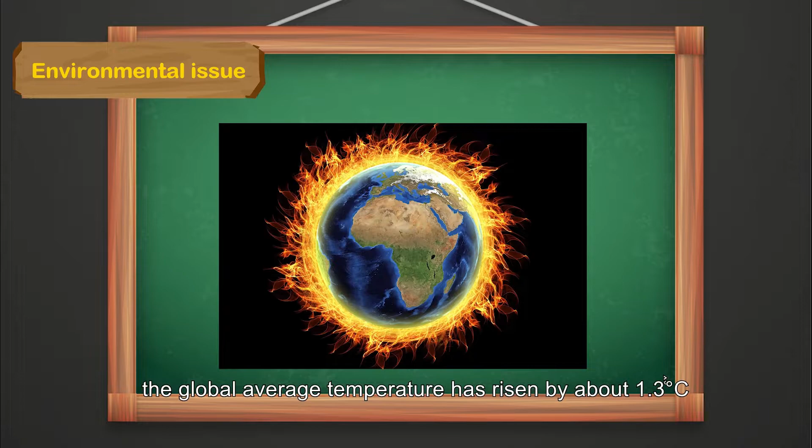Over the past 100 years, the global average temperature has risen about 1.3 degrees Celsius. Reducing the environmental pollution and greenhouse gas emissions caused by fossil fuels is a mission we have to face. For sustainable development in Taiwan, the Executive Yuan has set a target of 27 gigawatts of renewable energy power generation in 2025, accounting for 20% of the total power generation.

In response to the advent of the green economy era, the Executive Yuan officially announced the promotion of the construction of the Shalun Green Energy Science City in Tainan, with the four main targets of energy creation, energy storage, energy conservation, and system integration, to promote the development of the green energy industry and enhance industrial competitiveness.

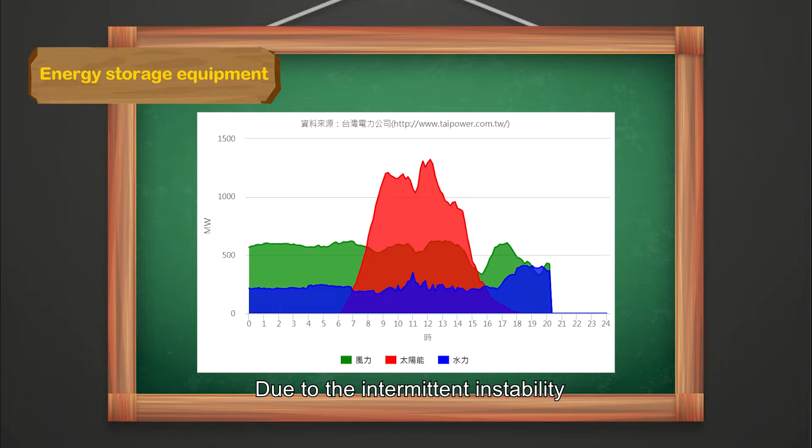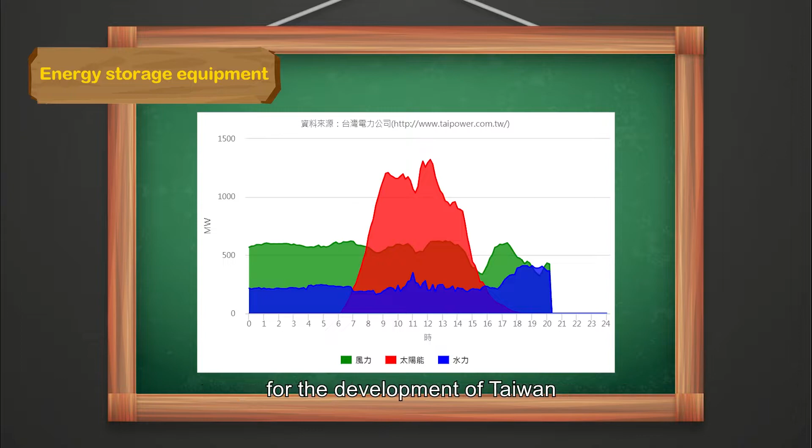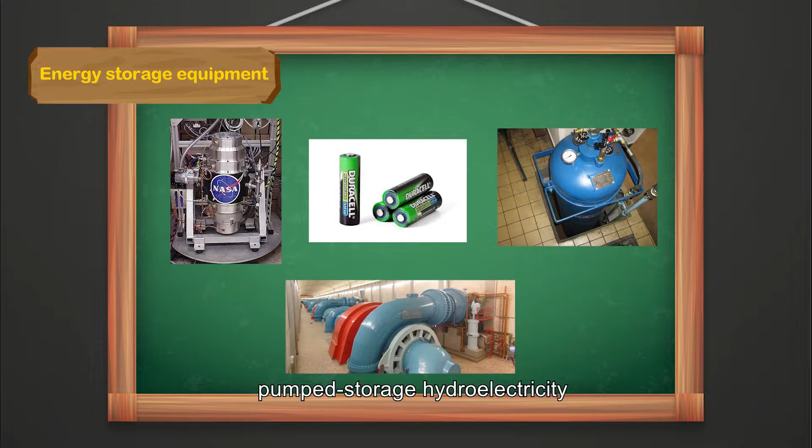Due to the intermittent instability of renewable energy power generation, the development of a set of stable and reliable energy storage technologies is of importance for the development of Taiwan. Common energy storage methods include flywheels, batteries, compressed air, pumped storage hydroelectricity, and power-to-fuel. Among them, power-to-fuel is the most suitable energy storage technology for large-scale and long-term discharge.

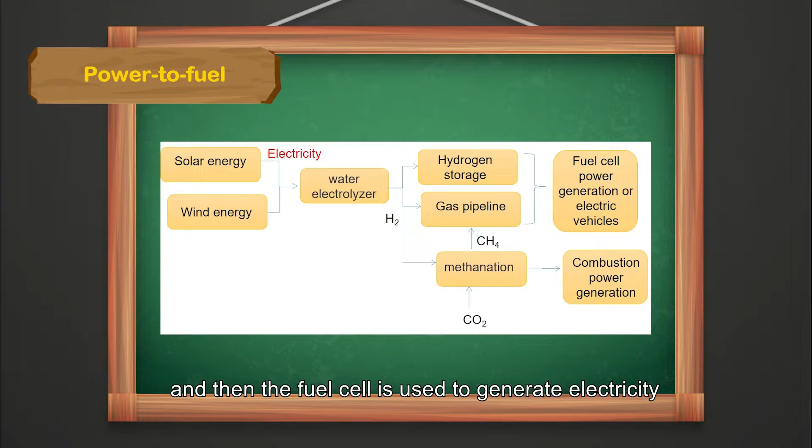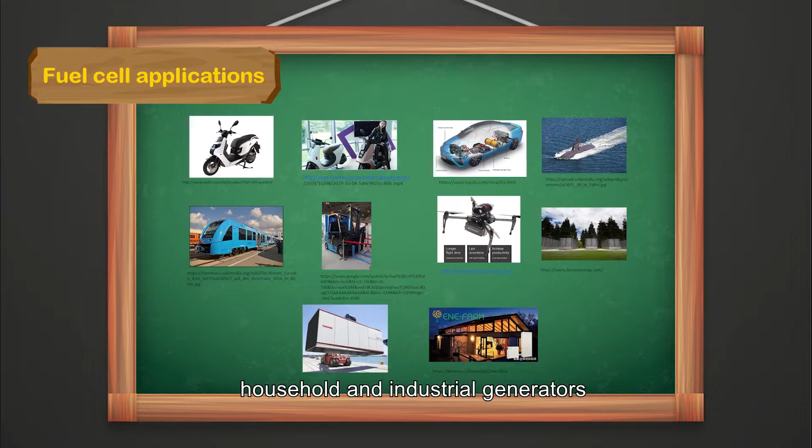Power-to-fuel is the use of electricity from renewable energy to produce hydrogen through water electrolysis. Hydrogen is stored, and then the fuel cell is used to generate electricity. Examples of fuel cell applications include motorcycles, vehicles, trains, forklifts, drones, submarines, household and industrial generators. For example, Japan's Toshiba released power-to-fuel products in 2015.

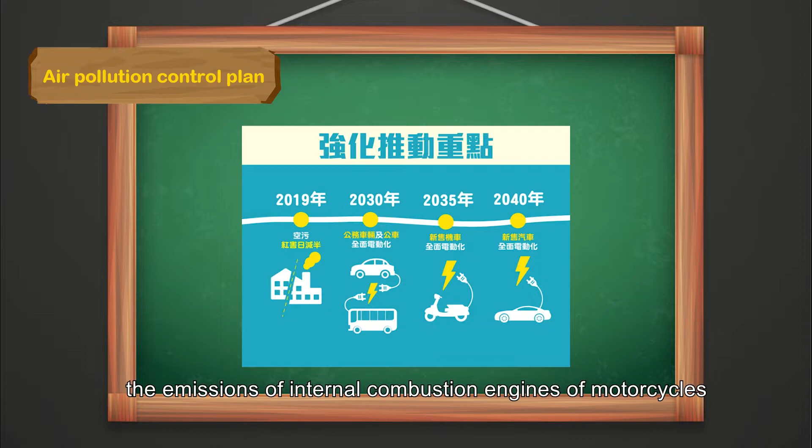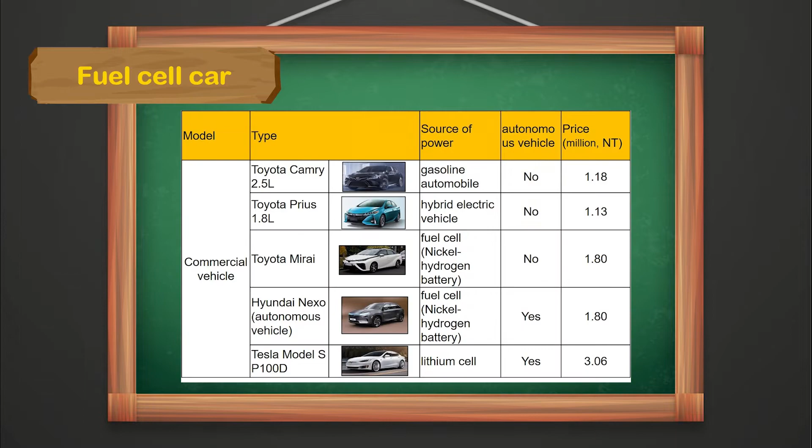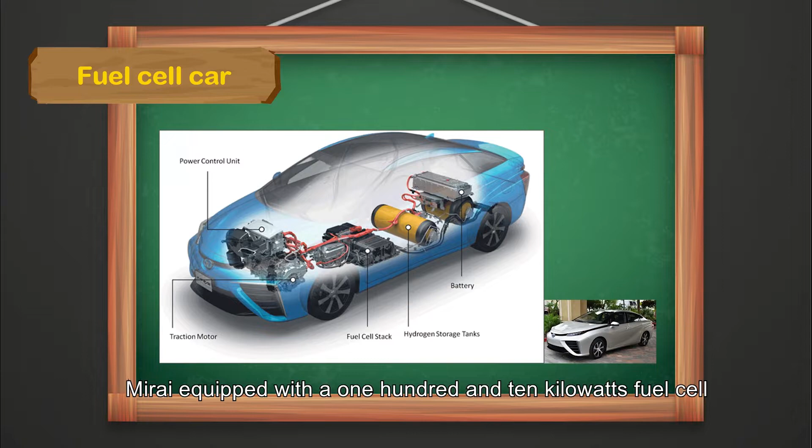At present, commercial fuel cell vehicles have been sold abroad. Take Toyota Mirai as an example. Mirai, equipped with a 110 kilowatt fuel cell and filled with 5 kilograms of hydrogen, can run 500 kilometers.

In view of the importance of hydrogen energy and fuel cells, Yuan Ze established the Fuel Cell Center as early as year 2000.

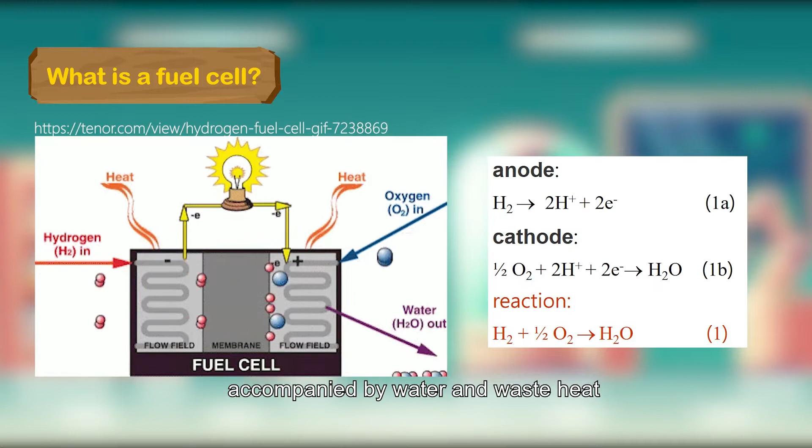If H2 and O2 can be continuously supplied to the electrode, the fuel cell will continue to generate electricity, accompanied by water and waste heat. The design of the fuel cell needs to consider several factors. For example, in order to improve the uniformity of fuel power generation, it is necessary to design and install a gas flow channel plate, a gas diffusion layer, and an airtight gasket on the outside of the electrode.

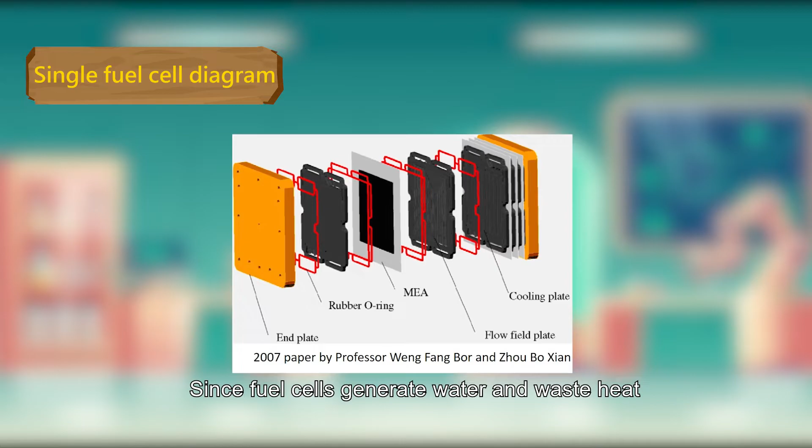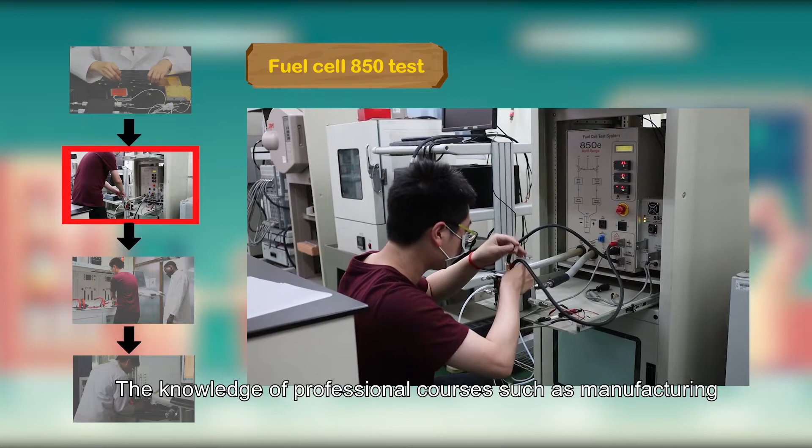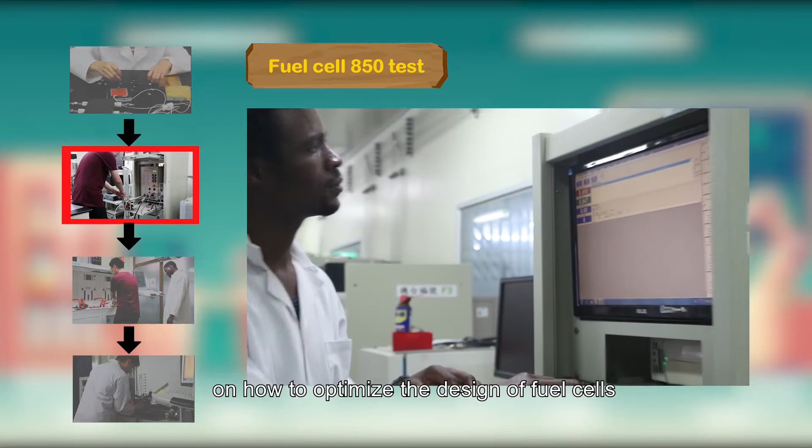Since fuel cells generate water and waste heat, water and heat management and fuel fluid delivery are also key design technologies. The knowledge of professional courses such as manufacturing, heat transfer, fluid mechanics, and fuel cells taught by the Department of Mechanics can educate students on how to optimize the design of fuel cells. In order to improve R&D efficiency, the center designed an 8-channel fuel cell measurement instrument.

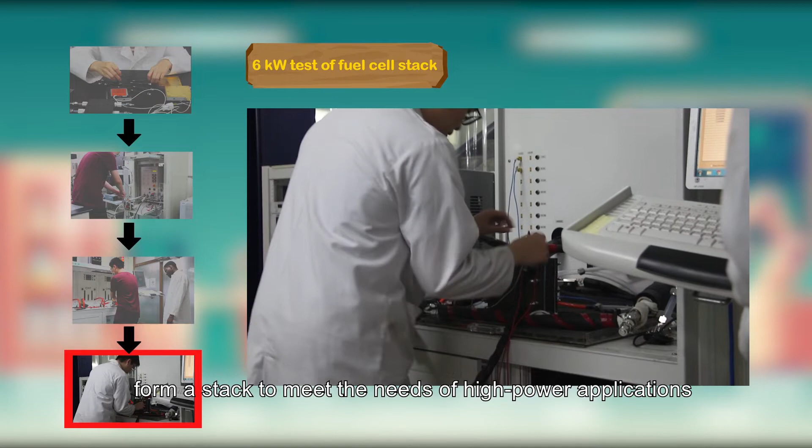Fuel cells can be connected in series according to the amount of electricity generated to form a stack to meet the needs of high-power applications such as energy storage and electric vehicles. The center has a 6 kilowatt fuel cell analysis instrument, rare in Taiwan.

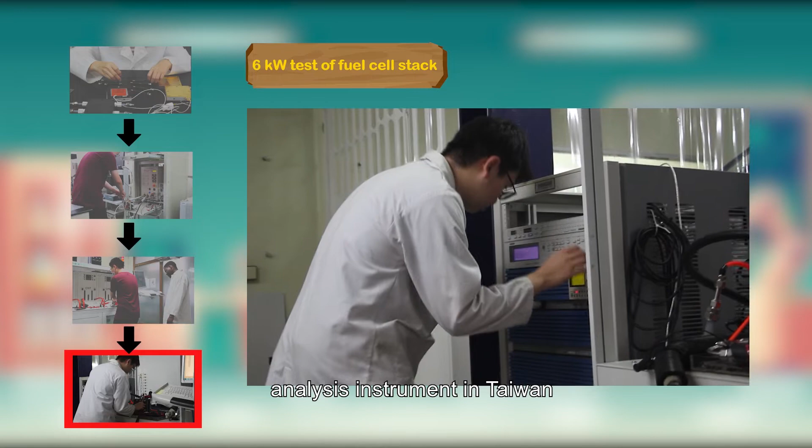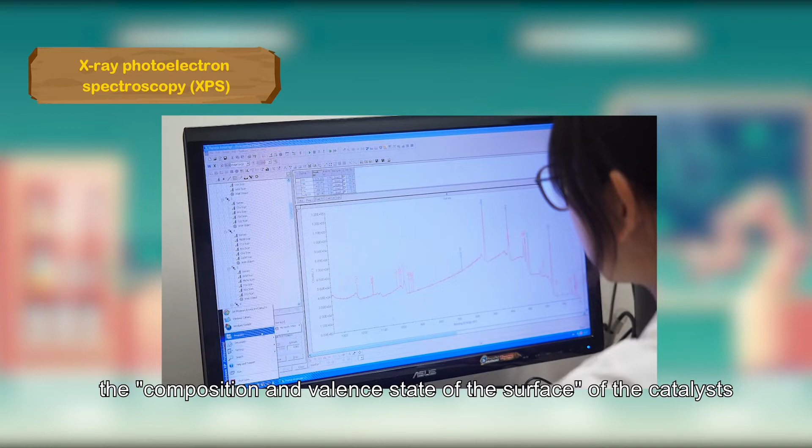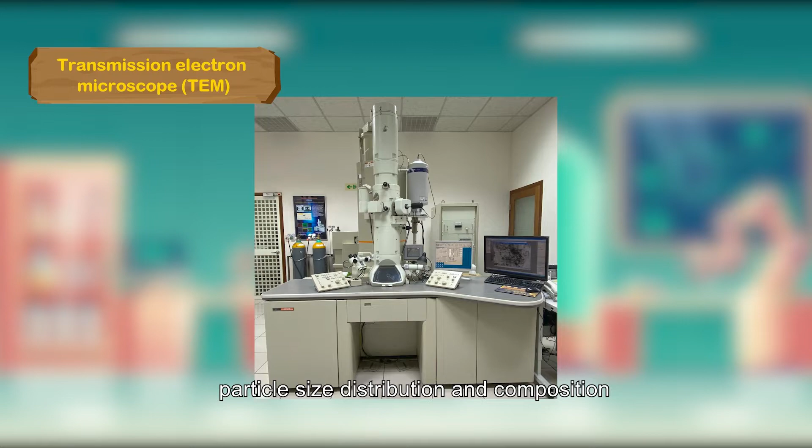In addition, the X-ray photoelectron spectroscopy can quickly and accurately analyze the composition and valence state of the surface of the catalyst for hydrogen storage materials and catalyst for fuel cells. The transmission electron microscope can identify the crystal structure, particle size distribution and composition of catalyst or hydrogen storage materials. TEM is a powerful tool for improvement of hydrogen energy technology.

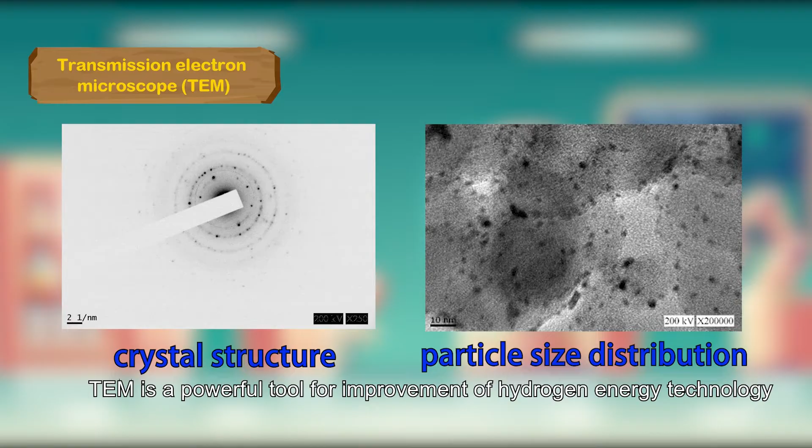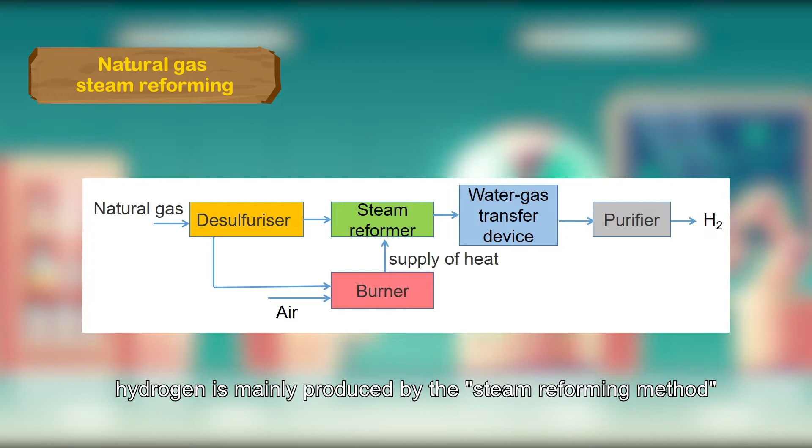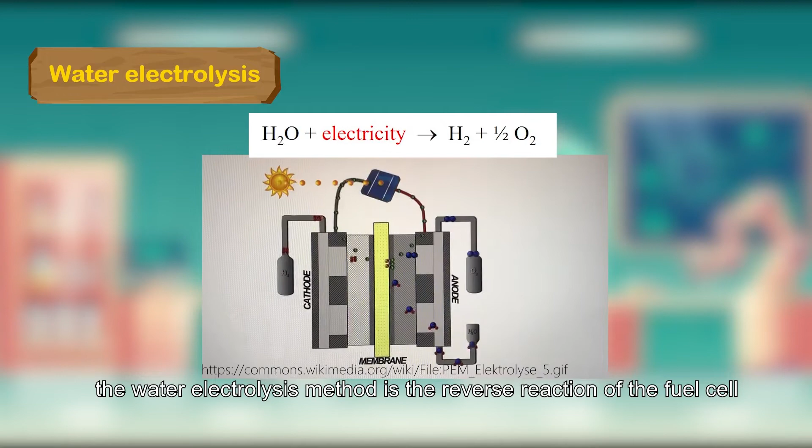Currently on the market, hydrogen is mainly produced by the steam reforming method, including 5 reaction units. In view of the future renewable energy, the proportion of water electrolysis hydrogen production methods in the market will be higher and higher. In terms of operating principle, the water electrolysis method is the reverse reaction of the fuel cell. Professor Zhang Guobing developed the membrane electrode assembly to form a water electrolyzer and customized it into a water electrolysis system. He has obtained several patents.

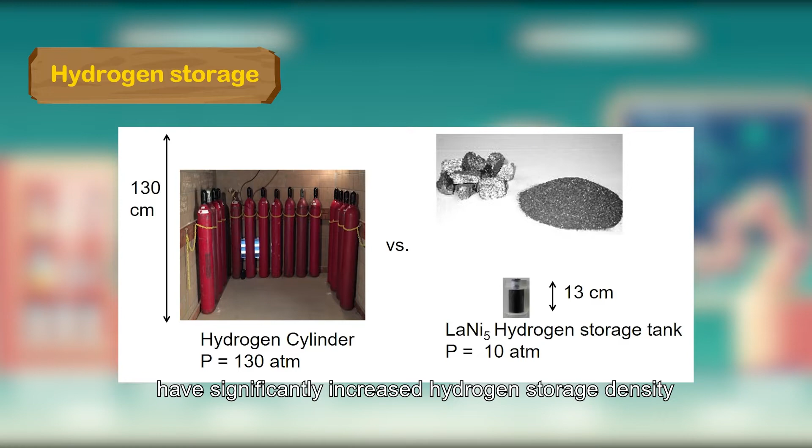Traditionally, hydrogen gas is stored at 130 atmospheres at high pressure. In recent years, hydrogen storage alloys such as lanthanum nickel have significantly increased hydrogen storage density and reduced hydrogen storage pressure. The principle of the hydrogen storage alloy is, first, the hydrogen molecule is adsorbed on the surface of the material. Under the action of the catalyst on the surface, the hydrogen molecule dissociates into hydrogen atoms, and then the hydrogen atoms diffuse into interstitial sites of the crystal.

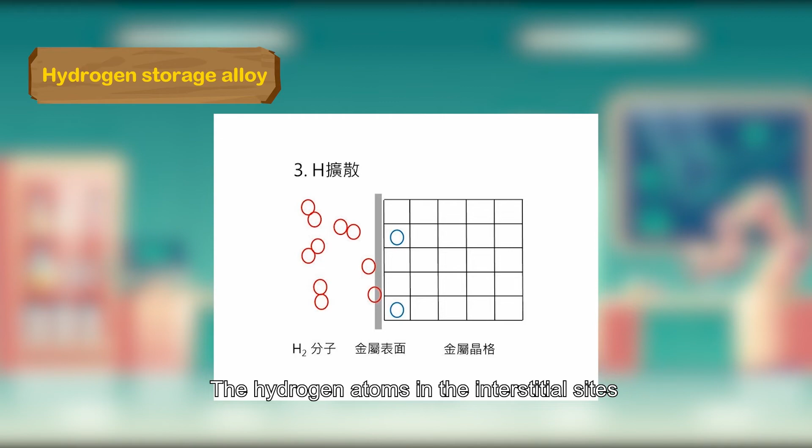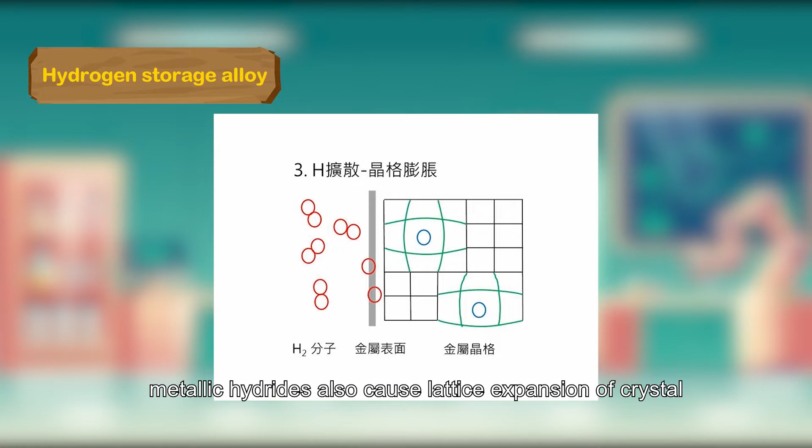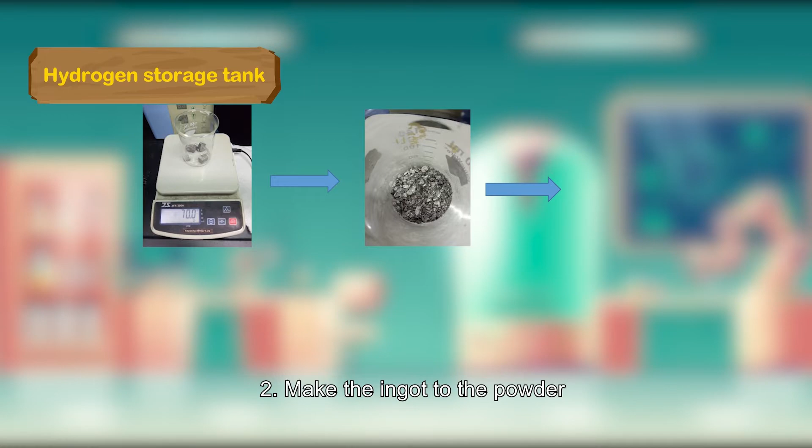The hydrogen atoms in the interstitial sites react with metal atoms to form metallic hydrides. During hydrogen absorption, metallic hydrides also cause lattice expansion of the crystal. The steps of the hydrogen storage tank include: 1. Take the lanthanum nickel ingot. 2. Make the ingot into powder. 3. Pour the powder into the hydrogen storage tank. 4. Place the filter and lock it.

In recent years, the Fuel Cell Center has developed new technologies to significantly reduce the hydrogen release temperature of magnesium hydrogen storage materials from the traditional 350 degrees Celsius to 250 degrees Celsius. Our center participated in the energy storage of Green Energy Science City with the research team of low-temperature magnesium hydrogen storage materials and energy storage applications.

In 2018, the team teachers organized the 30th Symposium on Hydrogen Energy and Fuel Cells and invited experts from the United States' Bloom Energy and Professor Uchida from Yamanashi University to introduce the latest fuel cell-related technologies, attracting a total of about 200 people to participate in this event.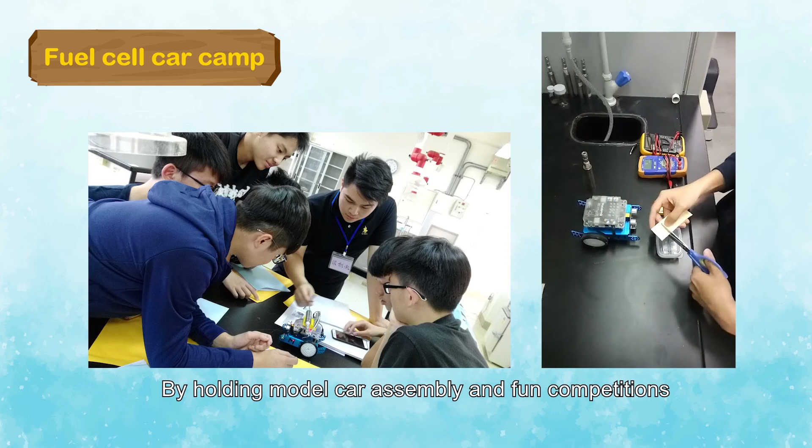An energy education exhibition is held, in which energy service groups are organized by college students or high school students to introduce energy technology and applications to teachers and students on and off campus with the theme of fuel cell or energy technologies. For the high school camp, the students from the mechanical department introduced the fuel cell principles to the high school students. By holding model car assembly and fun competitions, the university students not only internalized their knowledge of fuel cell technology, but also increased high school students' interest in learning about new energy.

Professor Li Qiyuan's team and Professor Zhong Guobing's team won awards. Professors Chang Hui-Wu and Jia Jiesheng's team won the Clean Energy Technology Creative Competition Award for their ability to simulate the self-driving function of fuel cell vehicles with lithium battery and fuel cell hybrid self-propelled vehicles.